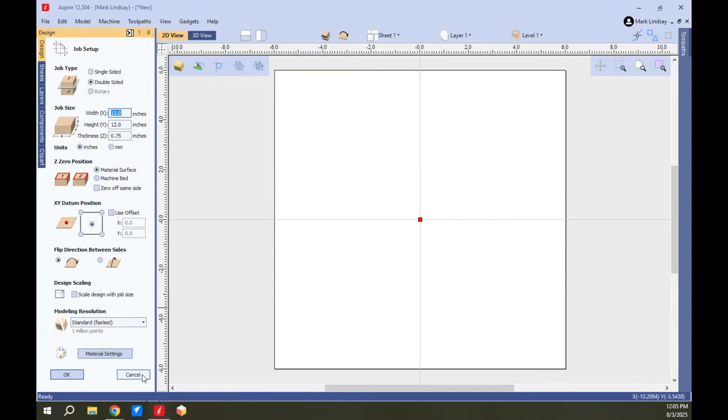Basically, there is a way to do it, but you're essentially making two separate files. You would not... your XY zero is set in the setup. Let me go ahead and bring Aspire in. When you go up here to job setup and select double-sided jobs, this is where your XY datum position is set, and that's it. You can't change your XY datum from one side to another. The only way to do that would be to make two separate files.

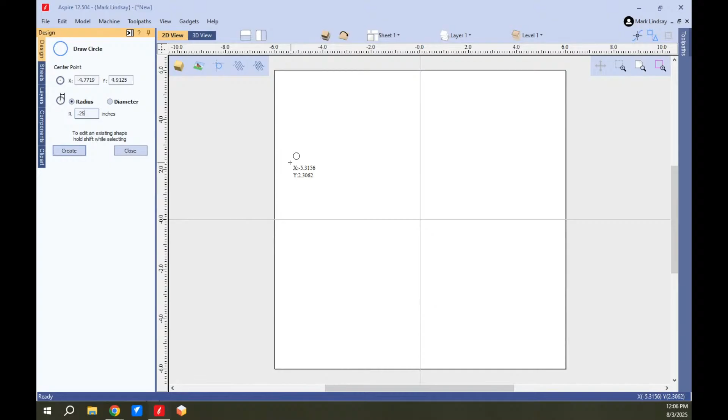But here's my question to you: why would you want to do that? When you set your XY datum here and set your registration pins, 0.25, we'll put one here and one here, asymmetrical.

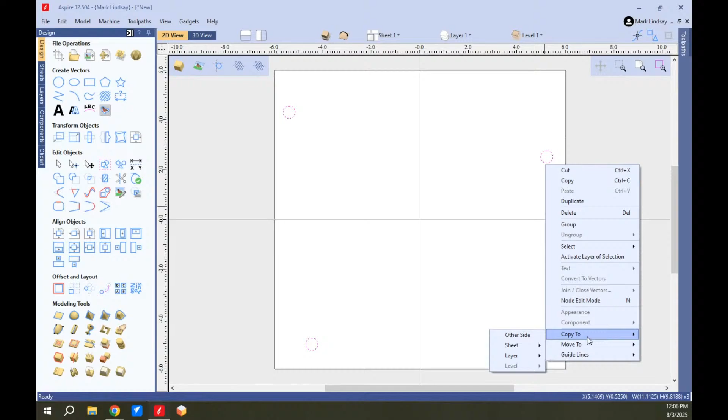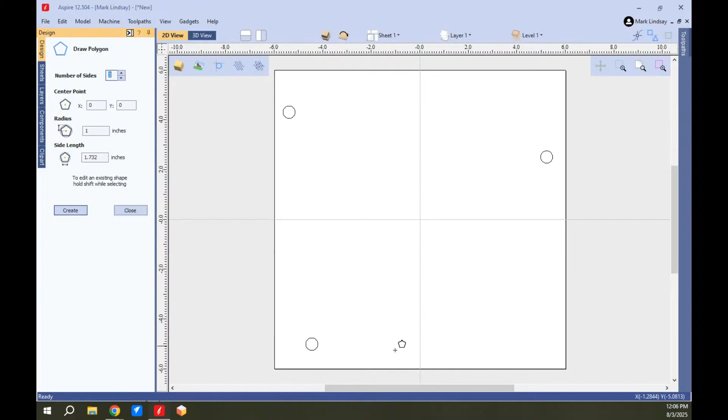When you set these registration dowels for flipping the material over and copy to the other side, the software, when you calculate the tool paths, knows where everything is going to be. It knows that if you want, say, a triangle over here on this side, but on the back side you want text centered right here, when you calculate the tool paths, the software knows where that is supposed to be.

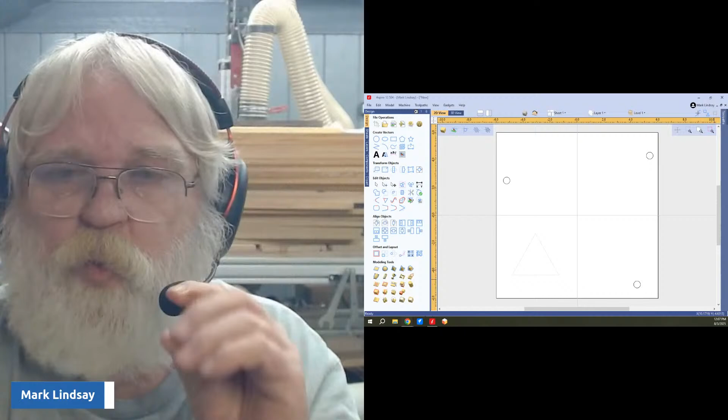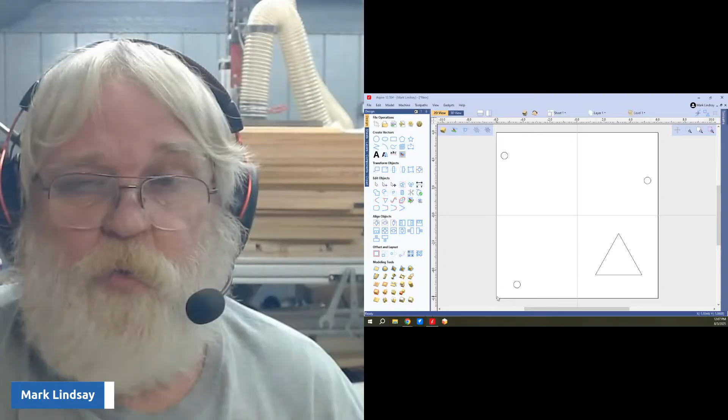And you set your XY0 once, at the very beginning when you first start setting up. Let's say for the sake of argument I set it at the bottom left. That's the only time you'll set your XY0. Then you carve the front side, take the material off, flip it over, set your registration pins, use the dowels, and fasten the material back down. You don't touch XY0, you don't reset it. The only thing you set is Z0.

So you don't touch XY0. Having two different origin points, XY datum positions, there's no benefit to that. In fact, you increase the possibility that something's going to be off. I just don't see any benefit to doing it. Now, if you wanted to do that, you could certainly make two single-sided files: one with the XY datum point at the bottom left corner, and the other in the center, for example. But if you're using the two-sided job setup, you really don't need it at all.

Yeah, as you said, it may just be too much time to think, and that's a trap that I fall into as well. It's real easy to overthink stuff, and you get yourself in trouble real fast that way. So there are some times, even if I know why it's done a certain way, I may think there's another way of doing it, but I just follow the rules because it works, and I don't have to reinvent the wheel.

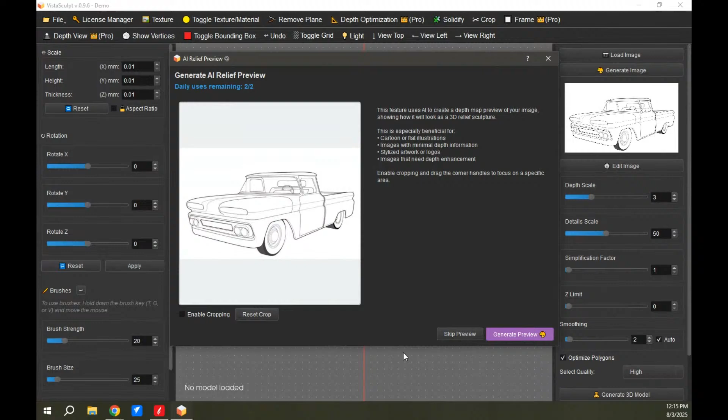I'm not going to bother with any edits or modifications, I can't really because I'm using the demo mode. I've got to use this image, and I'll go ahead and generate the 3D model. It'll take a couple of seconds, but this is a pretty simple drawing.

But basically, after your model is created, this is the size up here in millimeters. I'll also show you a couple of edits that should be done in VistaSculpt before exporting the STL.

This is taking its time, but it's the demo version, so what can you say? Let's get back to what y'all are talking about.

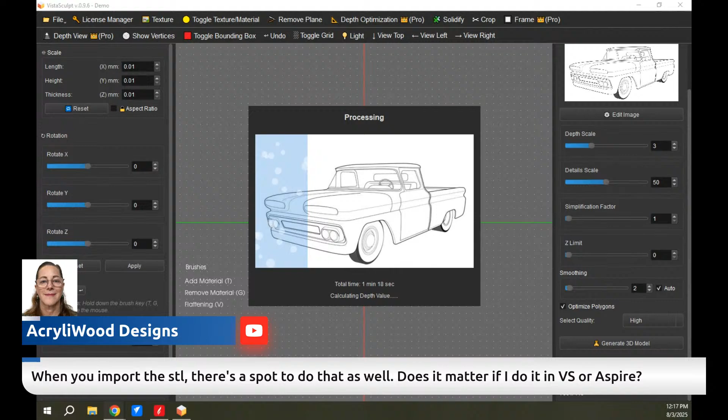She says when you import the STL, there's a spot to do that as well. Does it matter if I do it in VistaSculpt or Aspire? If you mean sizing the model, it's better to do it in Aspire, to be honest with you. Whether it's done on the import side or after you've imported it is totally up to you.

But keep in mind that when you do that, if you also import the image into Aspire and make a component out of that—and I'll show you that in a minute—the image and the model have to be the same size, or you're going to have some problems, and we'll get into that in just a minute.

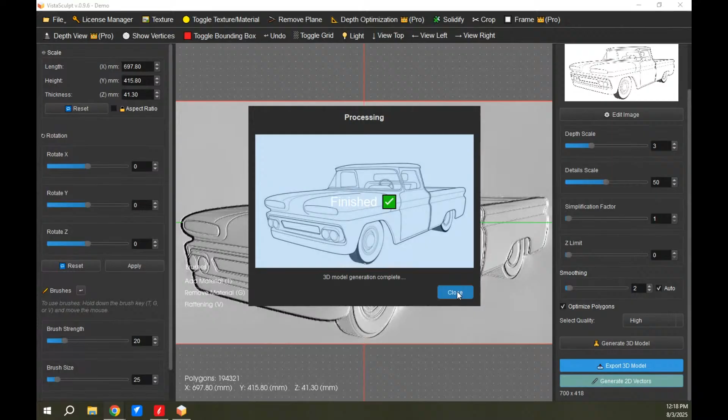Okay, we're almost done. Okay, it's completed the model. Now, one of the things that I would do in VistaSculpt, one of the edits I would make, is up here under Edit Image before I generate the model.

Now, again, I can't do it because I'm on demo mode. But one of the first things I do is remove the background, unless it's a feature of the image—say you're having your picture taken in front of the Eiffel Tower. Well, the Eiffel Tower is a feature of the image, so you may not want to remove the background then. But like in a portrait, or in this case right here, I would remove the background.

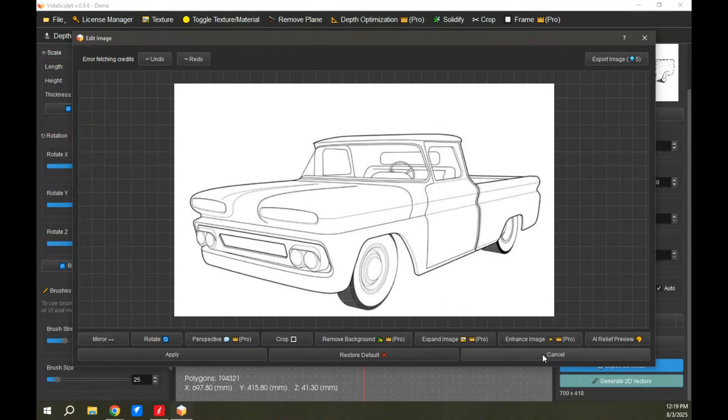It's white. This still gives me a solid background, even though that background is white. And if I zoom out here, kind of rock this to the side, we can see—

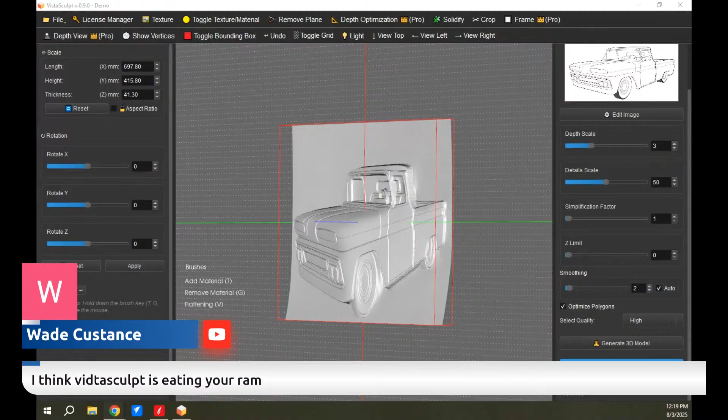I'm having issues with audio again. Yeah, I don't know if there's anything I can do about it right now. Is my audio back? I don't know, I'll wait for y'all to tell me if my audio's back.

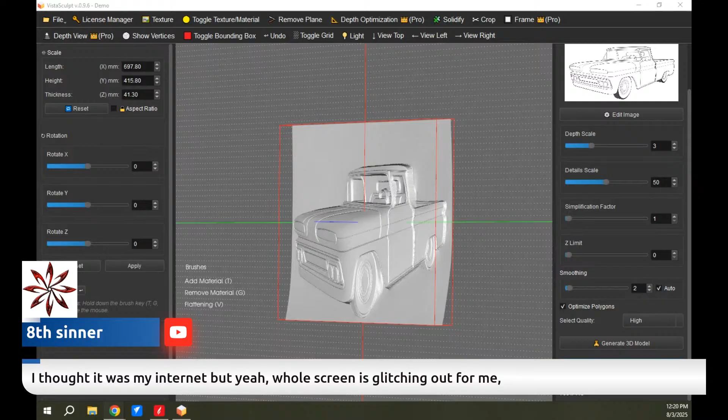There's a 30-second lag between what I'm saying now and YouTube. The whole screen is glitching out—is that just while I'm rocking this over? Is my audio back? My video back? Bueller? Anybody? This does take a bit of resources, and I'm not seeing anybody letting me know if my audio is okay.

Bob says it's okay now. All right, as I was talking about with backgrounds, you can see here that I have a flat background until it gets to about here, and then suddenly the background starts coming forward.

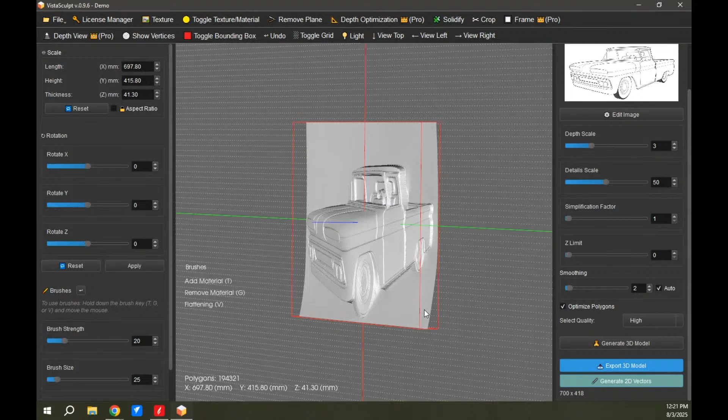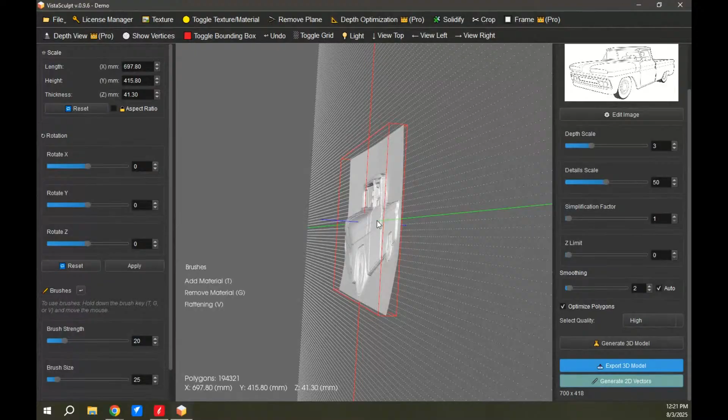That's because with the 3D model, it is assuming that this portion of the background is closer to you, the viewer. So you have this wedge shape in the model, and you can see how it's protruding in Z.

Now is where you make these changes, Marie. But again, it's all in metric. So if you make any changes here to your model size, make sure you click on aspect ratio—that way it saves your aspect ratio, your perspective.

If you change anything up here, say if you change your X dimension, it's going to keep everything in perspective. It will automatically change your Y and scale your Z.

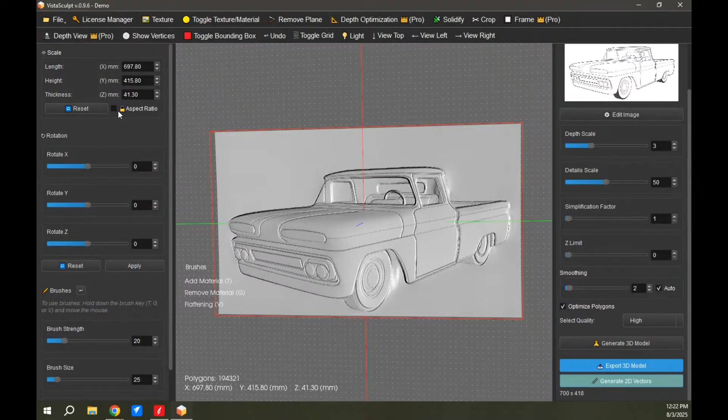Now here, you can change thickness without changing—if we turn off aspect ratio, we can change the thickness of the model if it is too thick. Now, 41 millimeters, that's not super, super thick, so I would leave that be.

If you were going to make any changes, you could make those changes here. Excuse me, no, I take that back. If you were going to make any of these changes, I would do it in Aspire, okay? So the short answer to the long question is yes, you can change size here, but it's not necessarily the right place to do it. I would do it in Aspire.

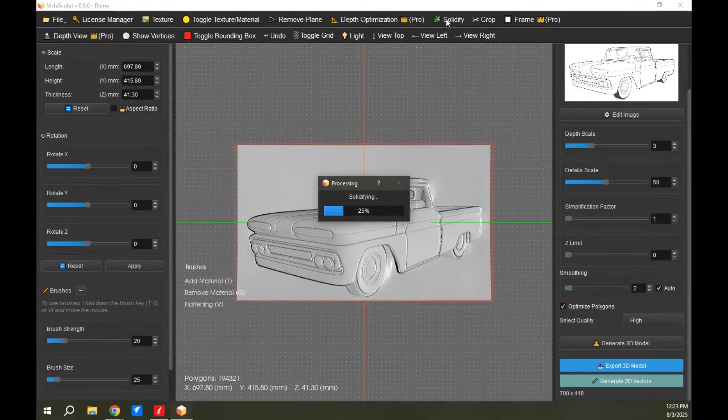One of the edits that I would make definitely here in VistaSculpt is solidify. Click on solidify, and what that did is filled in that wedge. So now it's a solid model on the sides here. We no longer have what looked like that foil, like this. Now it's a solid model, okay? Then you would export it. When you import it into Aspire, you can change the size.

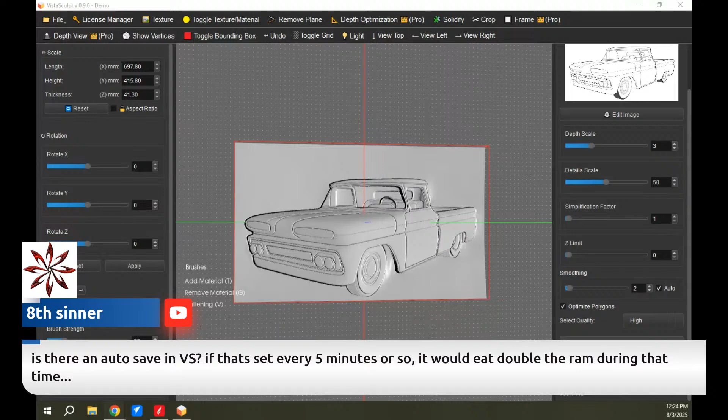Is there an autosave in VistaSculpt? No. If that's set every 5 minutes or so, it would eat double the RAM during that time, and that's why there is no autosave in VistaSculpt. That's why there's no autosave in VCarve or Aspire, because the same thing is true.

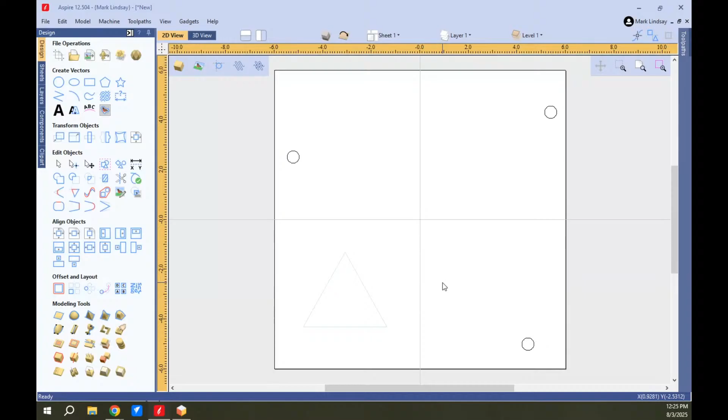If you have a complex model out here in Aspire and you're in the middle of hand tracing something around that model or a portion of it, you don't want autosave to suddenly take all your resources and pause the program. Autosave has been discussed with Vectric Software numerous times, and they have just said no, there will be no autosave. So if you're asking for autosave in your Vectric software, you're not going to get it, and it's for that very reason.

So I hope that answered that, Marie. I would still do all those edits in Aspire.

Now, speaking of Aspire, Marie wants to know, does anyone use the clear area of selected component in Aspire? I imported an STL, only needed to raise the face, and I thought I could separate, then go from there. No, that's not the way to use that. If you clear the area of that selected component, you're deleting that portion of the model, not splitting the model. There's another way of doing that.

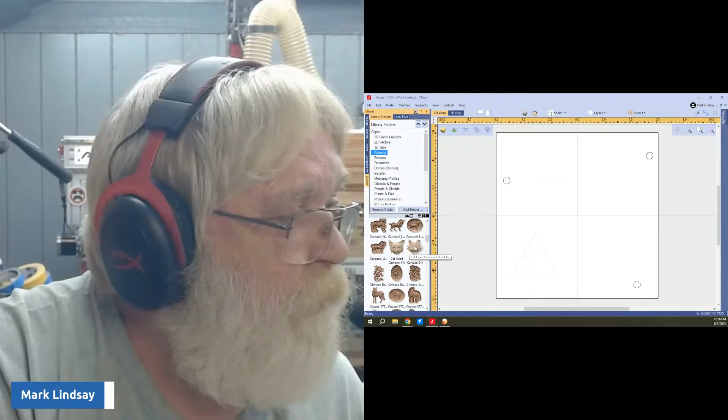What you'll want to do is let me bring a piece of 3D clip art here. Let's find something, what do we got? Man, let's see, something that would be relatively easy. Let's go with a cat head. Come on, put you out here in the middle, boy, and we'll make you nice and big here in the middle. All right, I almost said in the middle of our backside, but I won't say that.

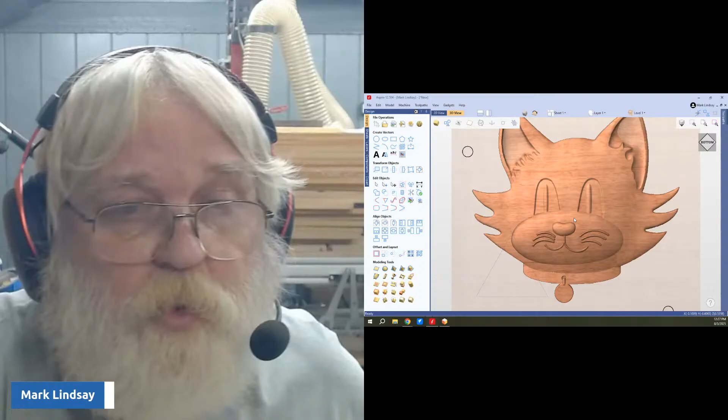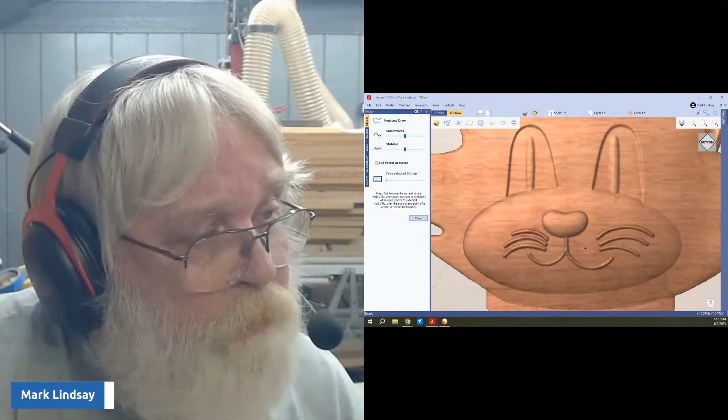Okay, we're going to go into the 3D view here and kind of zoom in. I'm just going freehand drawing. Now I gotta tell you, I'm pretty bad at this, so it's not a stretch of the imagination, in fact it's going to be quite lousy. But that's all right, then we'll just trace around here. And when I get around close, I'm going to hit Tab, and that closed that vector. So let me go over here to 2D view, and you can see that vector. I hit Tab, and that automatically closed that vector.

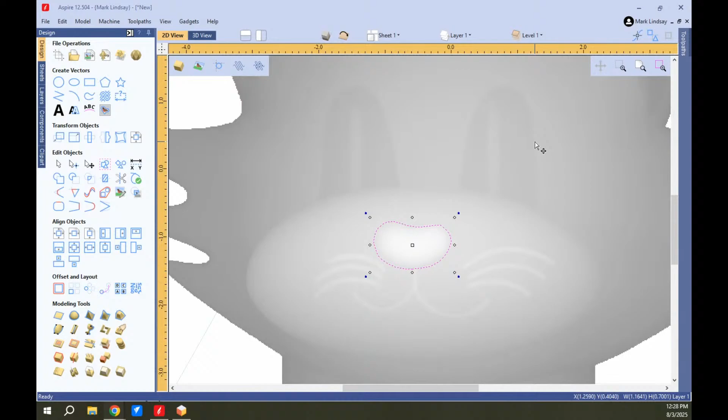Okay, let me put the spotlight on Aspire and the cat. Now I want to separate this from the model. So what I'm going to do is click off, then select the model, then hold down Shift and click on that vector. And now I want to, right here, split the selected component using a vector.

This is going to, okay Marie, you said you traced an oval around the face. Select the model, then select that vector. Then it's right here, split the... dang it, I got to click into the, there we go. Then it's right here, split the selected component using a vector. So I click on that. The component must be baked before editing, okay to continue? Okay, now it's done. This is now separate from the face.

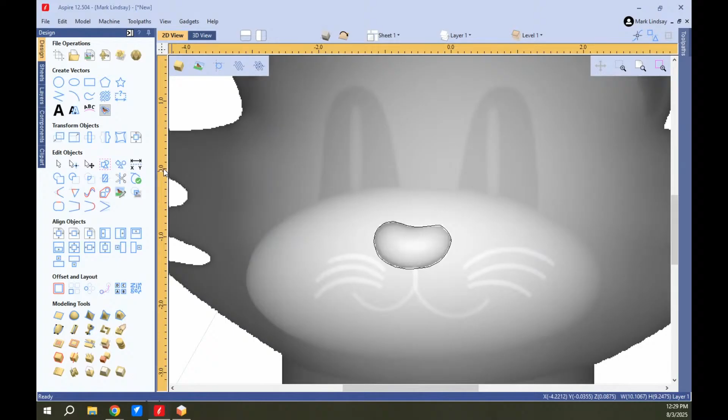So now when I jump over here in the components tab, I've got the nose and I've got the face. Now let me go into the 3D view so you can see what I'm doing here. I want the nose selected. I'll right click, come down into properties, and it's 0.668. Let's make it something silly so we can see what happens, we'll go with 0.8.

Let it make that modification, and you can see that nose got bigger. So I can adjust the size here. Let's go back to 0.668, let the software make that change, and it brought it right back down. So you see what it's doing—it split this section out of this model so I could modify this. This is what you want to do with your model, okay?

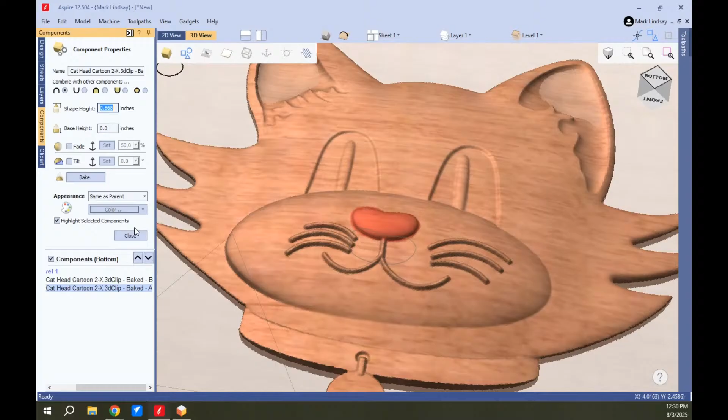Again, let's draw the oval where you want that around the face, as you said. And it's this icon right here: split the selected component using a vector. If you do this, it's going to delete that part of the model, okay?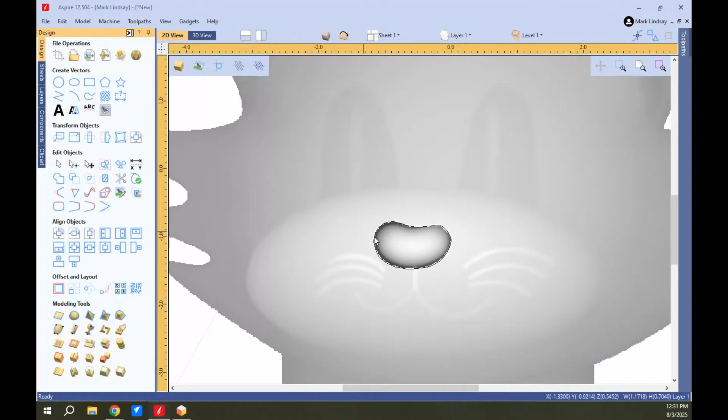So, I hope that helps out. I hope that helps with that one. That was something that we hadn't gotten into yet, but we're getting there.

After you've done all that, how do you smooth it into the rest of the model? Ah, that's where sculpting comes in, and that's an art of its own, okay? There are ways you can smooth and blend, you can smudge a little bit and things of that nature. But, yeah, it is an art.

I believe that's only available on Aspire. Let me check though, Rich. I'll bring up something in VCarve. I think that's only in Aspire though. I'm bringing up VCarve right now, and let me see, is that icon there? Yes, I'm sorry, but that is Aspire only. So, one more reason to upgrade.

Okay, I hope that answers your question, Marie. I know the part about blending and smudging and things like that are, you know, it's not a lot of help, but what can I say? So, let's see here.

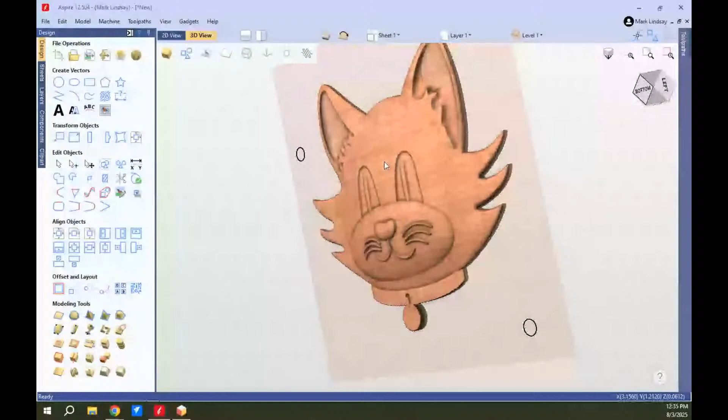And that's right here. Click on that icon, and you can see single-sided and double-sided views, and that's in the 3D view, okay. Right now—oops, that button, Mark. There we go. And now I'll click on this right there, and I'm seeing both sides. But there's only 3D content on one side. But yes, that's this icon right here, okay.

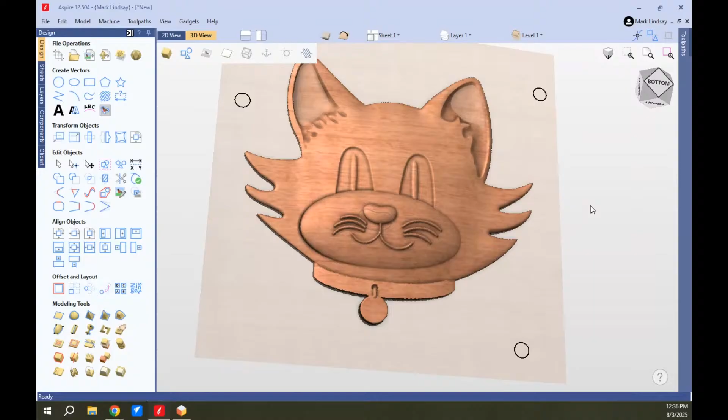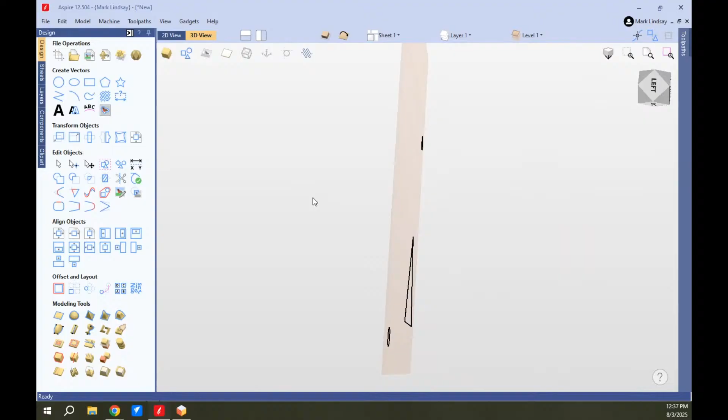Something that I've yet to see mentioned in any of the video tutorials from Vectric is: when we're in the 2D view, we can see which side we're working on because the scale is a different color. I'm working on the bottom, and I know that because this scale is orange. If I flip it, now we're working on the top because the scale is gray. When we're in the 3D view, how do we know which side we're working on? Because I can flip this like this, but I don't know which side we're working on. There is one way to know, and I've yet to see this shown in any video tutorial.

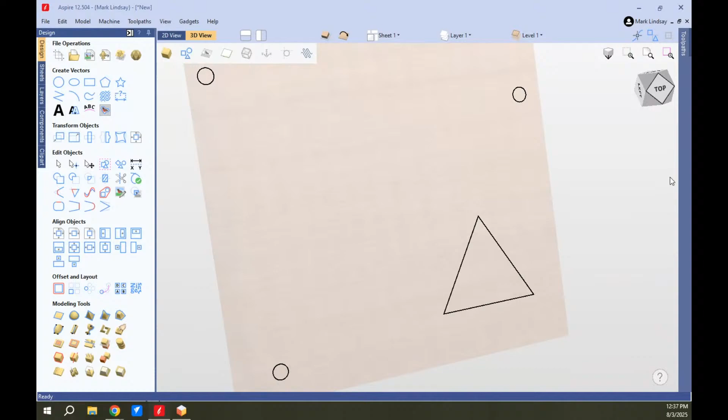And that is this black line around the diamond that says top. When I flip it over, none of the other views have that black line in it. That's the only way you know. Yes, in the 3D, look for that black line around the diamond that says top. So now, click on it to center up, and now I'm going to flip over to the bottom, and you'll see bottom has that black line around it.

That's the only way you know that that's what you're working on, so be mindful of that. Now we'll flip back over to the top and bring that down.

Sometimes designing in the center is easier, but your material reference is easier on a corner. I agree, Pete. I almost always design my designs from the center, and you'll see it when I do demos and in videos.

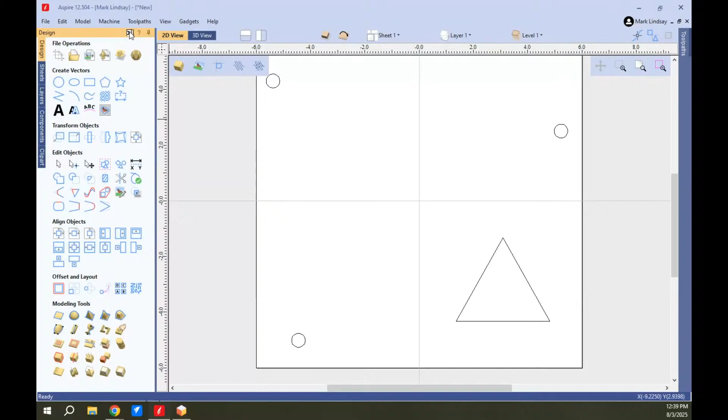I put my XY origin right here. I don't show it in every video, but when I go over here and start calculating tool paths, one of the first things I do is go into material setup. This is when I change my XY origin to the bottom left corner as I check out my model thickness and all that other good stuff.

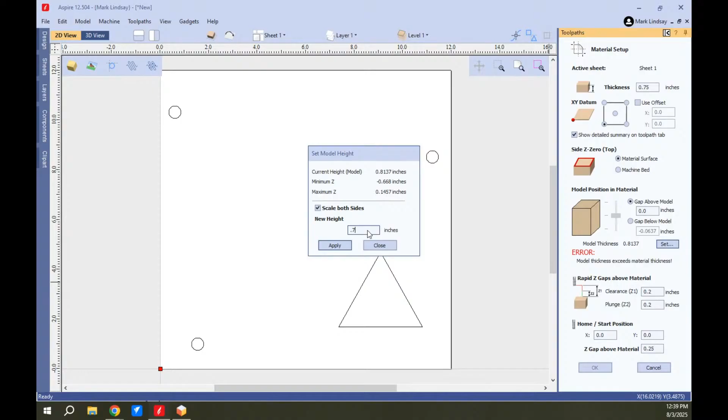I'm going to have to reset that model thickness to 0.74. Apply, close. Now my model is no longer thicker than my material. I can click OK, and now my XY origin is here before I start calculating tool paths. I don't show that in every video, but in practice, that's what I do.

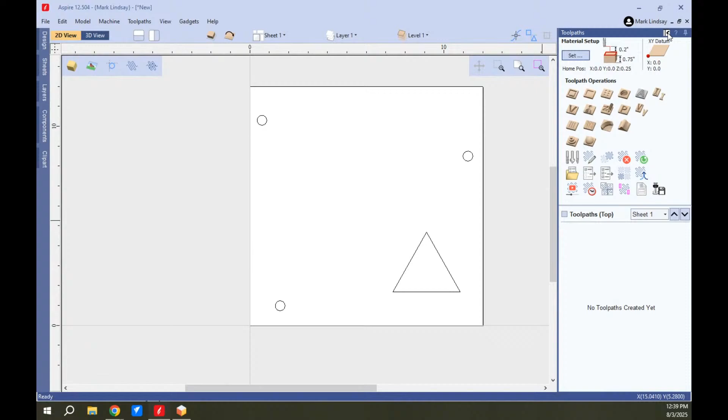When I'm designing over here, I agree with you, it's just easier for me when I have my XY origin in the center. So that's how I do it as well.

So let's come out of here and let me take a look at what y'all are saying, if you're saying anything. Excuse me.

8th sinner says it would be nice to have an alt control assist on the dice, yeah, I call it the meatball, to assist to move in perpendicular angles when rotating, for example. Okay, there is one aid there, okay?

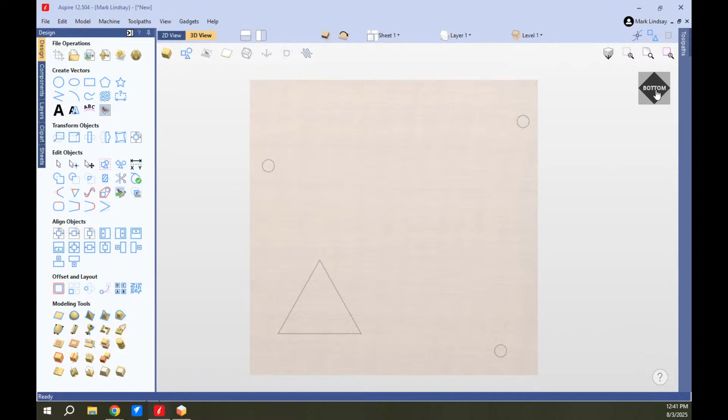Bring back up here. When you're in the 3D view, if you want to access the opposite side from what you're on, say I want to look at the bottom real quick, I can put my cursor up here, double click, and it's going to rotate it to the bottom. Then I come up here and double click, and it'll bring it back up to the top. That's the only aid that I'm aware of.

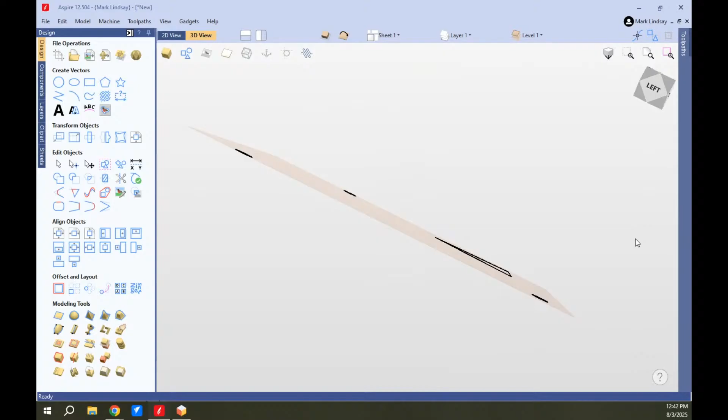But that is a real good idea, and in fact, I'm going to suggest it. If there was a way we could put our cursor over this, hold down Control or Alt or whatever, and then use our cursor buttons, say I want to rotate to the left, I should be able to hold down Control Alt and then hit the left cursor button, and this thing rotates to where I'm looking at the left side. I think that would be...

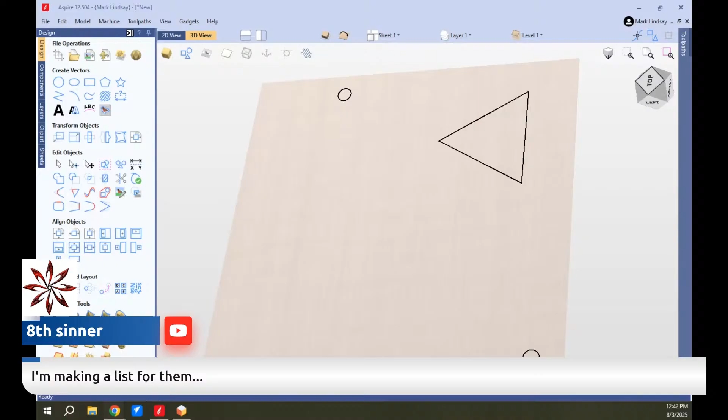Don't make the list too long. Send them suggestions as you have the suggestions, because if they see a big old wall of text, it's probably going to get ignored. So make sure it's a short list, it doesn't have to be a super, super long list. But that's a good idea.

Pete says you know the side by referencing the cube at the top right. Yes, that's how you know. And I asked...

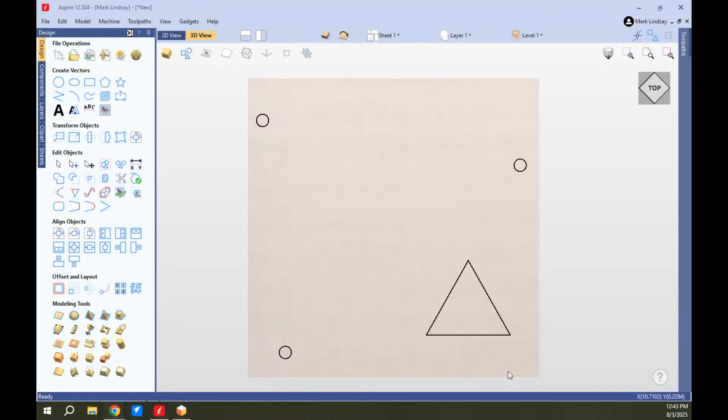Maybe some of you would like to make this suggestion as well. I said, okay, having this black line is all well and good, but since you have the ability to make this another color, how about in the 3D view you make this the same color? Can't you make this, if you can put a black line around it, can't you make that diamond that same orange color? That way it's something right there visible, you know what I mean?

So that's my suggestion. They haven't acted on that, and they haven't told me yes, no, maybe, or go away, or anything like that. So I think if they made that the bright orange, that's a good visual cue that you're looking at the active side. So all right, well anyhows, let's come out of there, let's see here.

There's a lot of workflow improvements that could be made to 12.5, yeah, but maybe it hasn't been out long enough for people to complain about it. They do listen to our suggestions, that's where they get their ideas for a good part of what they're doing, their upgrades and their modifications and all that stuff. So keep those suggestions coming to them. Let's see here.

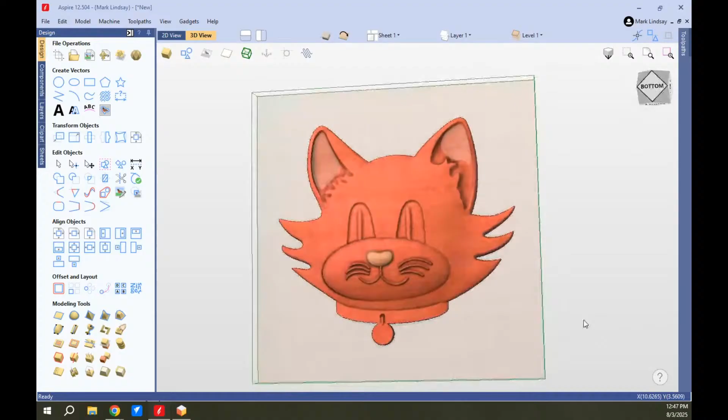My apologies. We're talking about these icons up here. Again, they only take up about a half inch. One here turns on and off your 3D view if you have a bitmap. This will show your material block, should you need it, you can see the entire piece of material from here. Then this one shows the XY origin out here. I'll turn that off, turn that off. This turns on and off your guides, should you have any guides.

That's something they've added in 12.5, that you can right click and click guidelines, and you can insert a horizontal guide here. You can drag it to wherever you want, place it in a specific spot, hit enter. You can rotate it, click and enter an angle all in the 3D view, and this will turn them on and off.

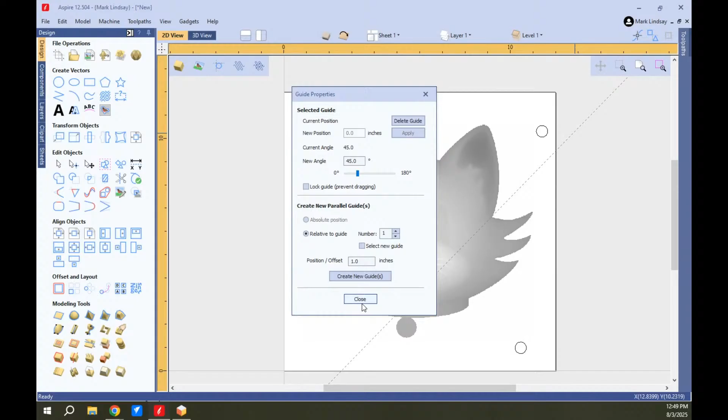Go over to the 2D view, and there's your guideline. You can still edit the guideline here, delete it, put it in a new position, whatever you'd like. Back over to the 3D view, this one is trying to turn off the guide here. Trying to remember what this one does, I don't recall, somebody help me out. I know in the 2D view it toggles your toolpath drawing style, but I don't recall what this does in the 3D view. Yes, the guidelines in the 3D view was one of the improvements in 12.5.

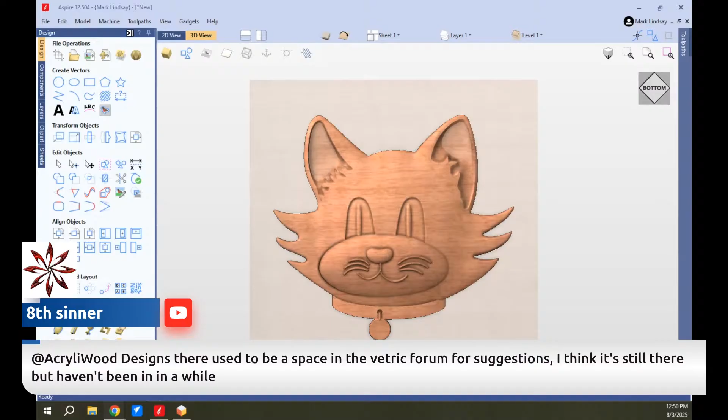8th sinner says there used to be a space in the Vectric forums for suggestions. I think it's still there, but I haven't been in a while. Yes, there is a space for making suggestions in the Vectric forums.

I'm going to climb up on my soapbox for a minute and admit to being a major hypocrite when it comes to preaching from this soapbox, in that I think the Vectric forum is one of the most underused, underutilized resources that exists, and it's simply because folks forget it's there. Now this is where I become the hypocrite, because I forget it's there too. I don't use it as much as I should, I don't use it as often as I should. Take advantage of the Vectric forum.

Dwayne Ruthig says that icon I couldn't place toggles the toolpath in the 3D view when selected. Okay, thank you Dwayne, I appreciate that. I couldn't remember off the top of my head, and it's one of those icons where the little bubble prompt doesn't pop up and tell you. But back onto the Vectric Forum.

The Vectric Forum membership is made up mainly of users like you and me. A few of the Vectric folks, the employees, are over there, especially the developers, and they kind of watch to see what's going on. But the overwhelming majority of the Vectric Forum membership are users like you and me, folks who use the software, have been there, done that, or are asking questions. You find all experience levels.

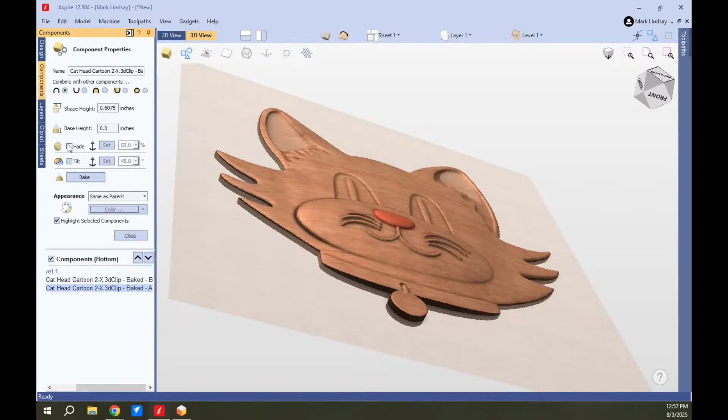Instead, I'm going to fade, and I'm going to use the same two anchor points. Bring it down here, then I'll click Set. And it's changed to an anchor. I'm going to use this point, click, and come over here to number 2, click. Then it's got 50%. It doesn't work in degrees, it works in percentages, okay?

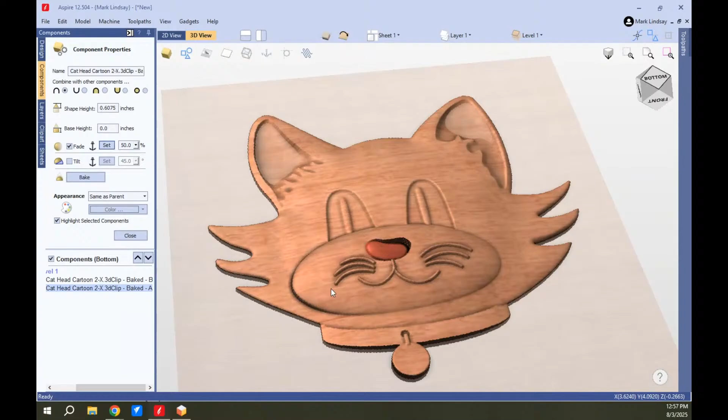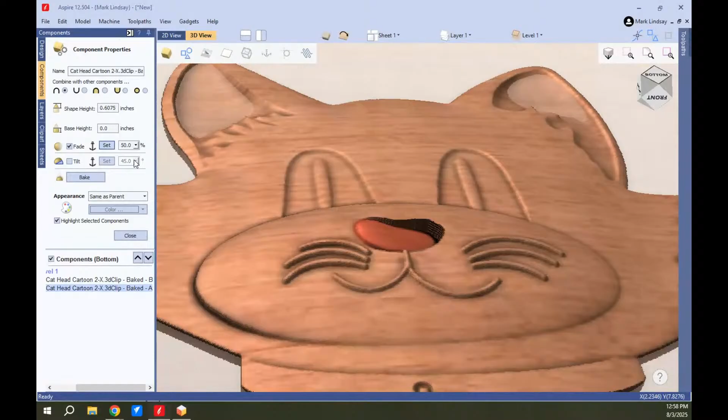What that did was it took this anchor point, kept that there, and faded down into, instead of up away from. So that's the basic difference: fading, you set one anchor point and that stays put. Fading is going to push the object down. Tilting is going to lift it up. The other main thing is fade works in percentages, and tilting works in degrees. Those are the two main differences.

Now I'm going to turn off fade and my nose goes back to normal. Close that, click off, and we'll forget that that ever happened, not talk about it again. So there's a basic refresher course on the difference between the two and how to use them.

Again, it's much like... let's see, that's the best way to put this. I'm trying to figure out, when you want to do something like that, when you want to make a modification, your first click is going to be where you want to start from, and the second one is where you want it to go to.

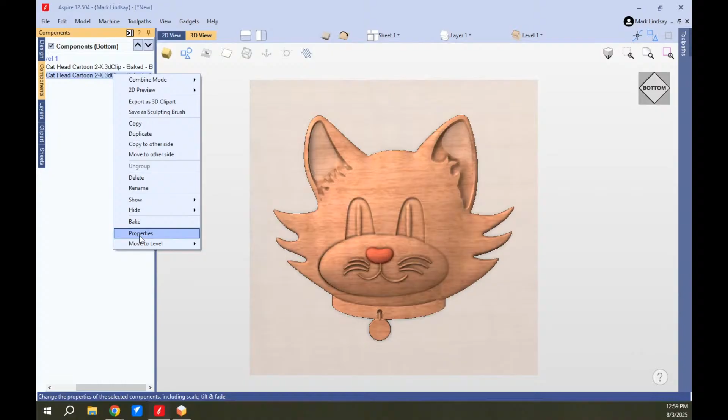How the heck did you get the anchor to highlight? Okay, I'll show that again. We'll come up here. I'm going to select his nose, right click, go into properties. I want to tilt - that's the anchor that we're going to set. So I want to tilt, and I'm going to click, bring that down to 0.

Now, you know what? I'm not going to do that, because I already had some tilt set for that. I'm going to select his head instead. Right click, properties - I've had no tilt or fade set here. Okay, now I'm going to apply some tilt to it. So I'll click on tilt with the component selected, then click the Set button.

See that plus sign by the anchor? That's where you want to set, that's where number 1 is going to be set at, that anchor point. I'll click on that, and that's where it starts. You see that red line? I'm going to pull that across to here. Now, it doesn't have to be here, I could go up to his ear. I'll go to his ear, yeah right there, number 2, and click. So that's where that tilt is going to take place.

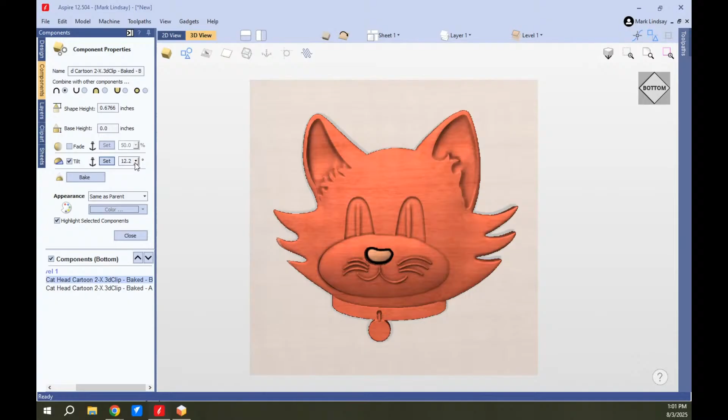Then I'm going to go in and adjust. Now I can use a slider here, or I can set degree here. Okay, so let's see what that did. Woo, that made him real tall there and real skinny right there. I don't want to do that. So I'll turn that tilt off, and again, click off, and never speak of tilting the cat again.

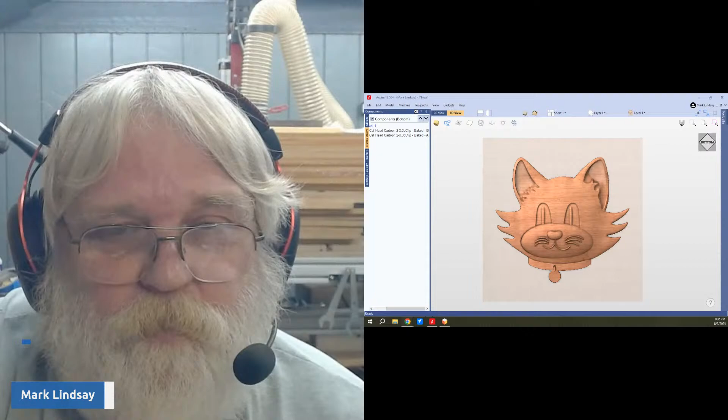Okay, let's see. Gene Scott says, I'm on the toolpath side, click on Save Toolpath, and it will frequently save CRV. I can try again, and it will be tap. Okay, let me get away from here and bring this back up full screen.

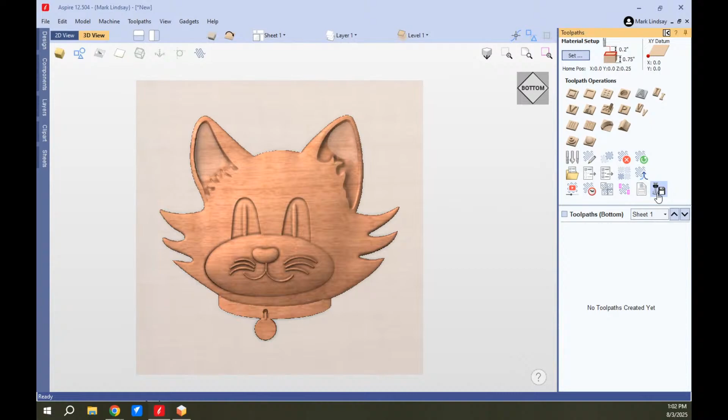I don't have any toolpaths calculated, but let's go over here. If you click on Save Toolpath, that is going to save G-code. A tap file is a type of G-code file, it's going to depend on your post processor. This will not save a CRV file. This will save a CRV file, but this will not save a CRV file. Okay?

Tap is one of the many types of G-code files. There are NC files, there are text files, there are CNC files. But yeah, this is used for saving the G-code to actually run on the machine. This is used to save this file. You need to do both. You want to save this file you're working on up here. And a lot of people ask me this question, you'll also want to save your G-code file, okay? If you save your G-code file and you don't save this Vcarve file, there is no way to get this Vcarve file using that G-code. It's gone, that's all there is to it. It's gone, so sorry, but it's important.

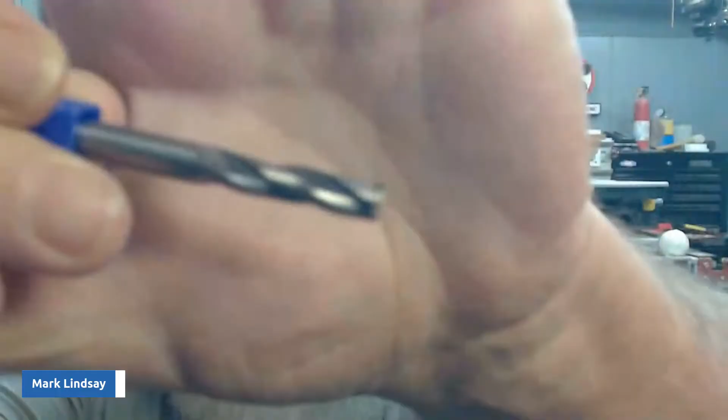I don't know if you can see the serrations on that puppy or not. Oh, come on. Well, you can see the serrations even though they're not in focus on that bit.

There you go. Those serrations on those cutting edges are meant to rip material out of there right now, mister. And like I said, there's nothing smooth, no such thing as finesse with this. Its job is, and you can also tell by the spiral, just the helix there, it's there to evacuate chips now.

So that will speed up a pocket cut. Just make sure that you've got a profile cut. Let me bring this back. A lot of people don't even know this is here. I've got two end mills here, right down here. For this one, you want a profile pass last. You want it to make a profile, okay? You want it to go around that pocket.

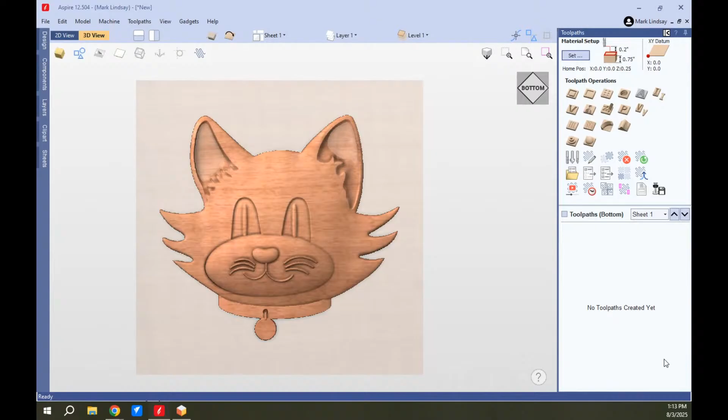Maria's asking, if I use a roughing bit and then a really fine bit, would you suggest using a bit in between those two tool paths? That depends on the situation. I've not run across that situation yet, but I could see where it would be beneficial.

Let's see here. I think, yeah, people in here saying they do work well, and yeah, they do work well and what have you. I just don't. I've had this for a year. I've never used it. I just don't have the need, really. I don't do production work, I do one-offs. Just about everything I do, I make one time and then that's it. So I really haven't had the need to use it.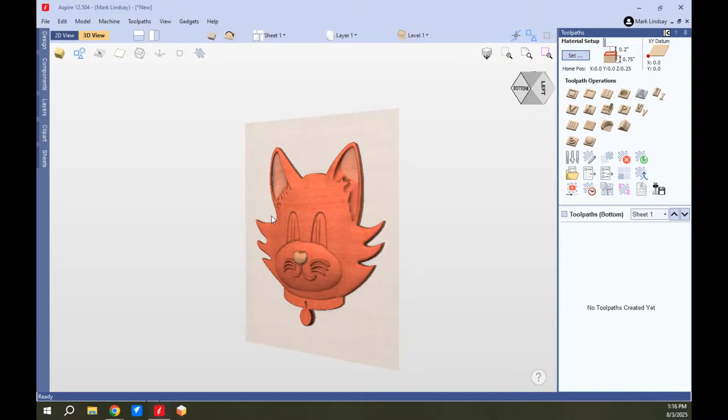Steve says YouTube has been buffering a lot of live streams the past couple days. Okay, Marie says it happens when you share a larger screen. Let's try this now. I turned off Vista Sculpt, so I don't know. Is this doing anything? Is this causing me any issues or anything like that? Now I'll take that down and make it all about me again.